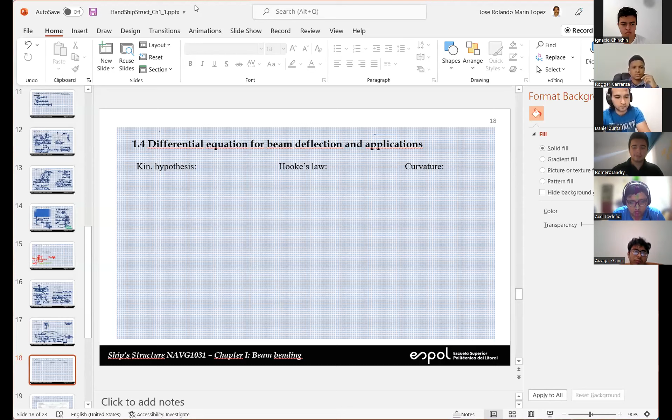Okay, so can you see my screen? Anybody? Yes, doctor. Thank you. I have a very small screen now. That's a problem.

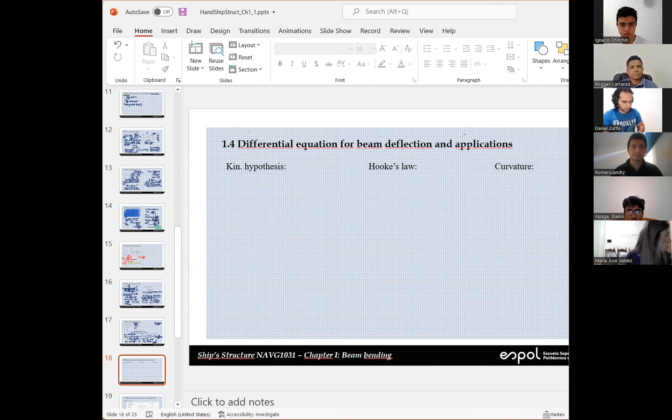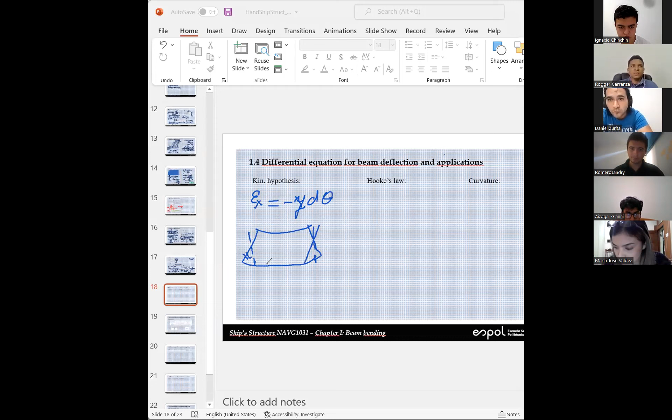So this review was about kinematic hypotheses, and this is what I'm trying to show here in this figure. Okay, so one of the ways we have to write the strain is that epsilon x, that's the strain, is equal to what? Minus y times d theta. And the thing here is that we have this deformed situation. This was the original one. So what we do is we draw a parallel to this in here. So this angle is d theta, and that angle is the same as this one. So if we are here, this is du. So du is equal to y d theta.

Okay, any questions about this, people? Anybody? Are you with me, people? Doctor, I have a question. Go on. Why is the sign in the strain negative? That's a good question. The thing is this. Let me erase this. Okay, everything here is positive.

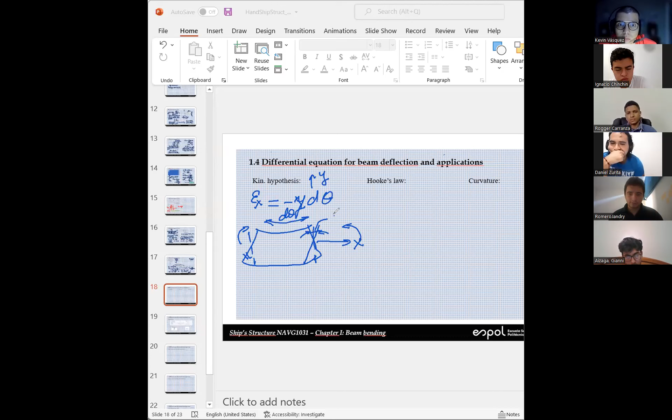And you see that with everything positive, this is the way the system is going to deform. So this is the u. And you see that the original length, which is from here to there, has reduced. Now the length is this one. So it is reduced. With everything positive, you have a reduction in length. That's why we need a negative sign.

I don't know who asked the question. I don't know who asked the question, if I answered the problem. Person who asked the question, please. Did I answer your concern?

I'm seeing that there is an error here. It's du equals minus y d theta. And epsilon x is du dx. So this is wrong. This is not correct. That means that if we divide this by dx, we get d theta dx. This is correct. This is not correct. But yeah, we need a negative sign.

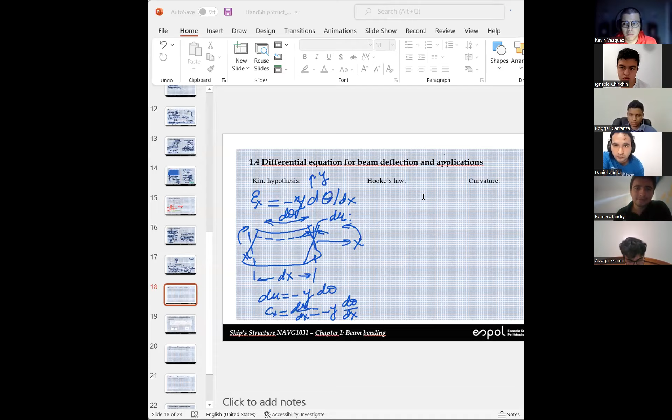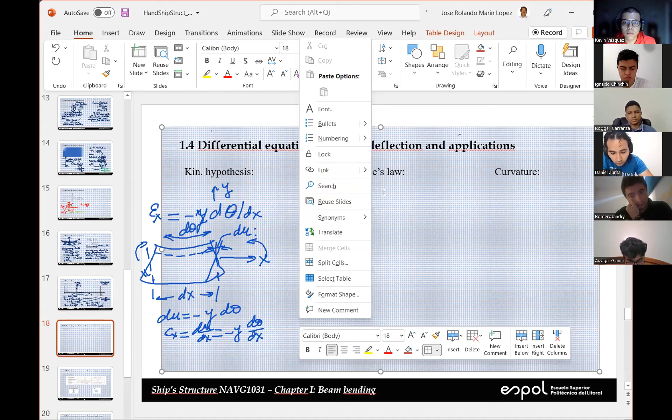And here, did you have problems with the symbology that I employed? See, the thing is this. This is rho, which used to be density. Here it is the radius of curvature. Now the radius of curvature exactly is this: 1 over rho is exactly equal to the second derivative of the function divided by 1 plus v comma x squared to the 3/2.

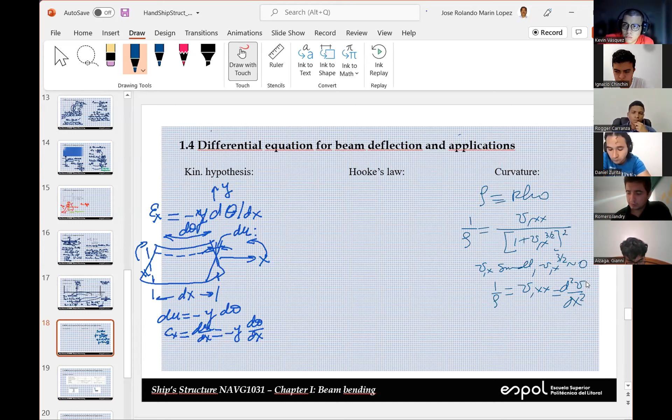That's exact. But what we do is assume that v comma x, the slope, is small. If this is small, we can say that the v comma x term is negligible. Then 1 over rho is going to be v comma xx, the second derivative of v with respect to x squared. This expression has units of length in the numerator and length squared in the denominator, so it's 1 over length, and this is 1 over length. Be careful, we have to check the units all the time. So this is the approximate expression for the curvature.

And I got lost here. The third question is the normal stress in beam bending. This is just an application of Hooke's law, which you have to review. When we have only sigma x, no other component of the stress tensor is different than 0. Only sigma x is different than 0. Then we can say that sigma x is simply E epsilon x. This is Hooke's law that you have to review.

Now, if you replace this using the approximation, this is equal to minus y v comma xx. So sigma x is going to be equal to E times minus that. This is an approximation, not exact. This one is exact. But the problem is that it is a nonlinear relationship. If we try to use it here, the solution process is going to be very difficult. That's why we prefer to simplify. So it's a simplification, but it's quite useful.

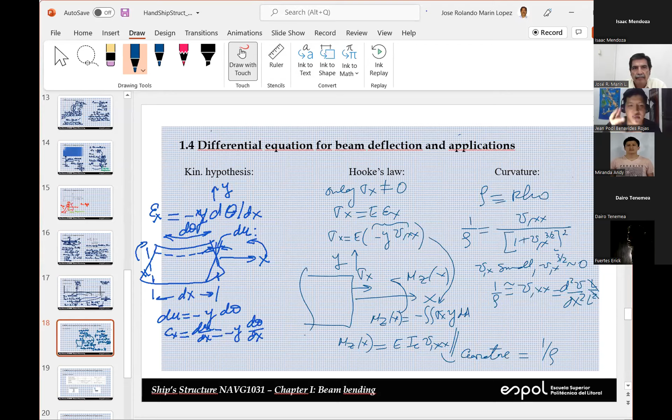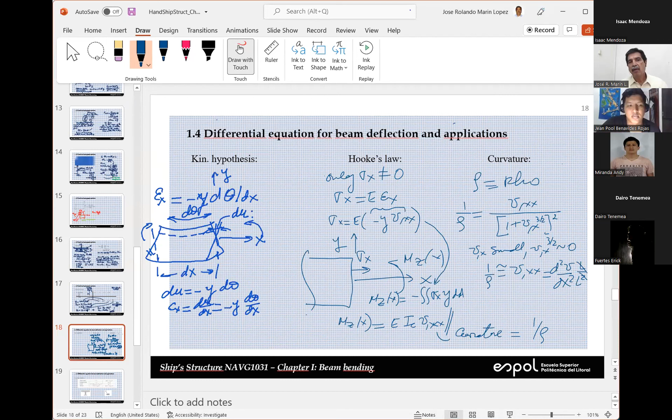Okay, Mr. Benavides, how was it? Was it too easy for you or what? Good morning, doctor. I think that I just want to prepare better, and at the beginning I was a little confused with the signs because I didn't understand well. Then in the second one, I understood better. Okay, the problem is that I don't have all these characters. I had to write rho, I had to grab theta, but I don't have the characters here to prepare this quiz. But anyway, the idea is to make you awake, okay? You have to review before the class. That's the message.

Mr. Tenemea, how did you do? Did you do well? Yes, well, for this evaluation. Good. Where are you right now, Mr. Tenemea? Doctor, I don't understand. Sorry. Where are you? In what city are you right now? In Cuenca. I live in Cuenca. Okay, good.

Miss Valdez, how did you do in this evaluation? 4 by 4? Not too well. I have to read more about this. Come on. Well, this is something which is very important. This is something that you mentioned, Ms. Valdez. In the evaluations, and this is for everybody, the first thing that you have to do is read. I'll say it one more time. You have to read.

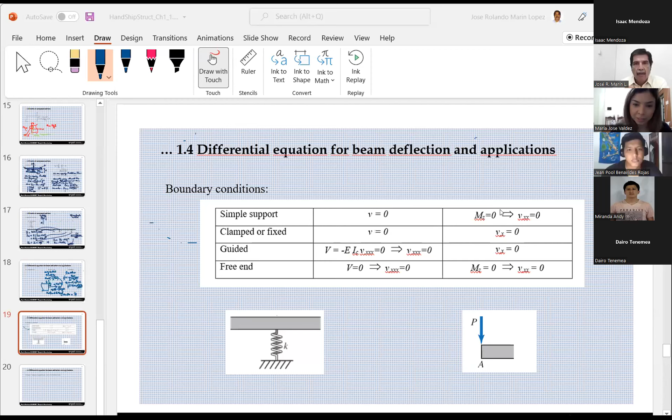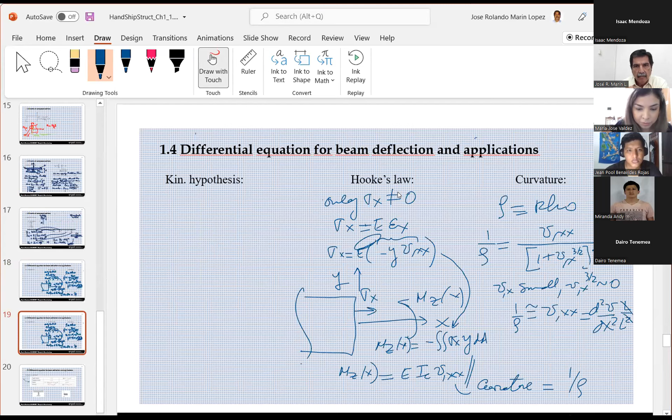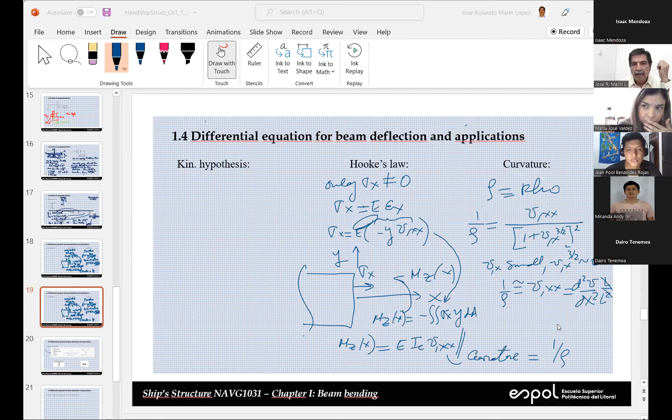Some reason, I don't know what it is. Okay, people, I need one fresh... Can you see my screen, anybody? Yes, doctor. Okay. So I have to write to the left because I cannot erase that. Let me see if I can erase this thing. Anyway, so here on the left.

We have two relations. First, we have something from equilibrium. And the equation is: the second derivative of the bending moment with respect to x is equal to p of x. This is inside the domain, so it is between 0 and L.

And now we said that the kinematic hypothesis, combined with Hooke, and also simplifying the curvature, using these three considerations or assumptions or simplifications, the bending moment could be expressed as E I sub c v comma xx. Now, what we do is we replace this into here.

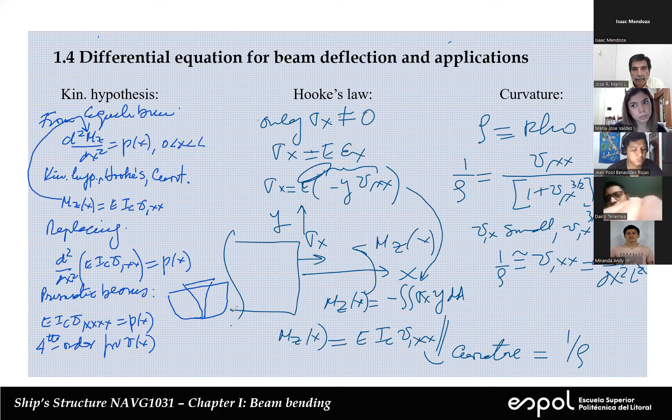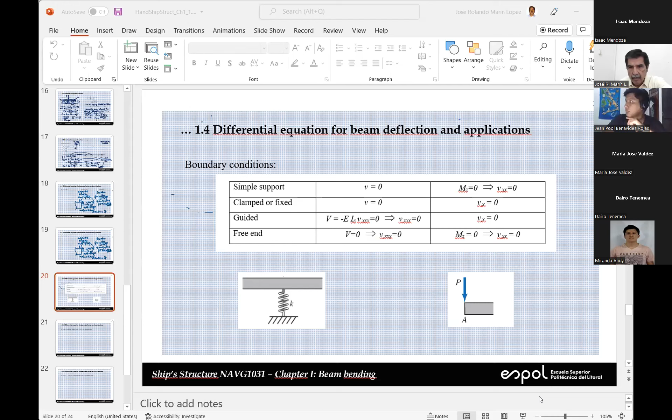Now, Jesus, I don't know what happened with this. Let me stop this because I don't know what happened. Just a second, please. Can you see my slide? Can you see my full screen slide? People? Yes or no? No? Okay, let me see. Today is Monday. Yeah, I know it's Monday. How about now? Can you see it now? Yes, doctor. Okay, good.

Okay, about the boundary conditions, remember that we need 4 of them. And here, these are the classical supports: simple, clamped or fixed, guided, or free end. Now, here I have separated them. In the second column, we are saying something about displacement. And in this column, I have something about rotation. So you see that for every type of support, you have one condition related to displacement and the other condition related to rotation.

For example, in the simple support, there is no vertical displacement and the bending moment is 0. Bending moment is related to rotation. In the clamped case, there is no displacement and there is no rotation. In the case of the guided end, there is no opposition to vertical translation. That means that the shear force is 0, so we have something related to displacement, force, and there is no rotation. And finally, in the case of the free end, it can move vertically and it can rotate. That means that there is no shear force and there is no bending moment. Hopefully all of this is good for you.

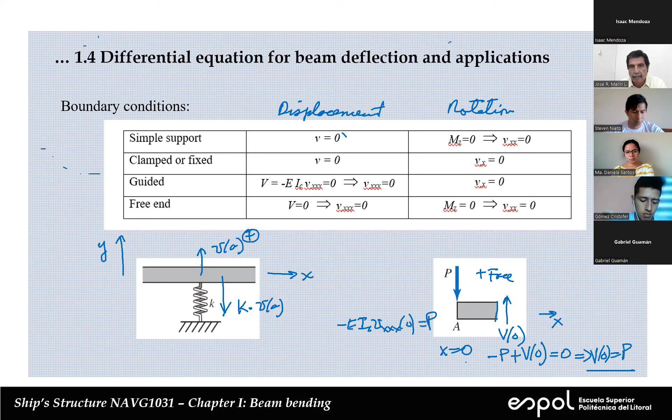Okay, now let's do a couple of examples. Let's consider a clamped beam with a concentrated force. So this is the example that I'm going to consider.

So it's clamped on the left, clamped on the right. We have a beam. You see that it is prismatic, and we have a concentrated force here. Let's put it downwards. So this is X, this is Y. The position where the force is applied is X equal A. The length of the beam is L.

Okay, so in this case, first thing that we have to determine is, is this a determinate beam or indeterminate beam? Mr. Ortega, Andres Ortega, what do you say? Is it determinate or indeterminate beam?

Indeterminate, doctor. How many, doctor, please don't call me doc. What are the reactions that we need to determine?

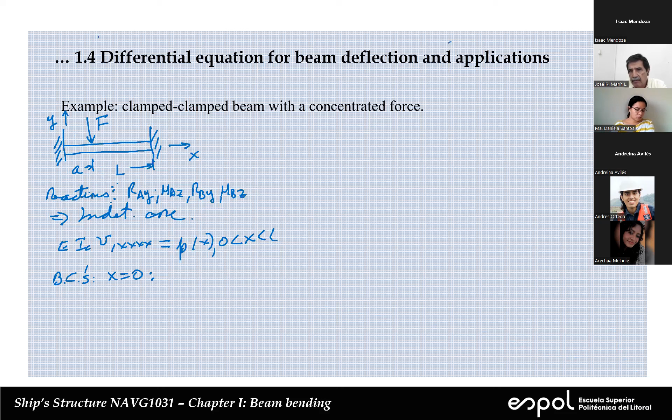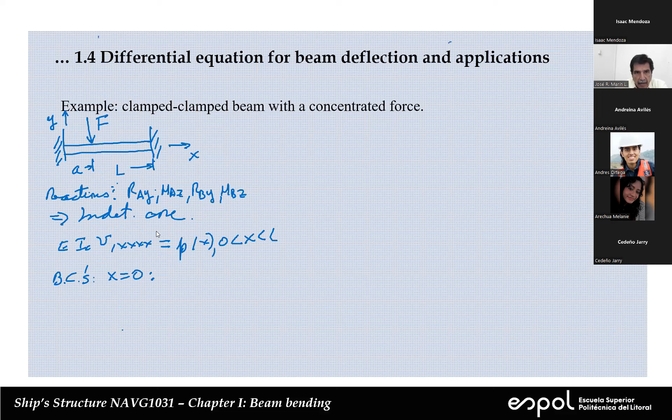No, it's a clamped case. Mr. Cedeño, Jarry Cedeño, what are the boundary conditions at X equal to 0? Slope equal to 0. And shear force equal to 0.

No, come on people. Miss Flores, Alison Flores, other boundary conditions at x equal to 0, it's a clamped end. Good morning, doctor - in displacement, it is equal to 0. On the rotation, the first derivative is 0.

Yeah, similar for x equal to L, right? So the displacement on the right end is also 0, and also the rotation. So this is it. And finally, before we go to the break, Miss Sigüenza, would you please tell me what P of x is?

P of x. Sigüenza, are you there? No? Okay, let's - oh, you're here. Go on. Sigüenza, are you there? No?

Mr. Soria, tell me, what is P of x? Mr. Soria? Yes, doctor. P of x. What is P of x, Mr. Soria? What is P of x? Let's write it here. What is it?

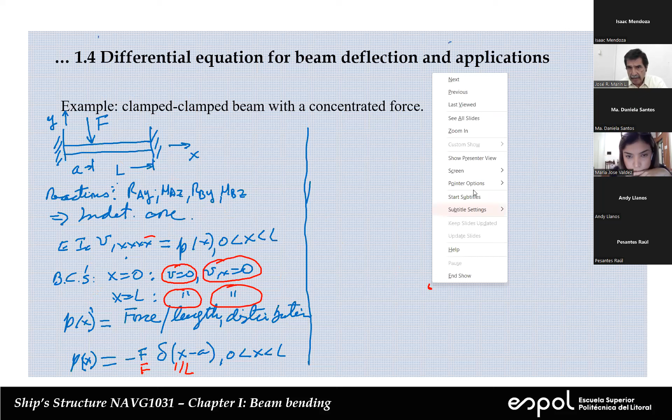Now, from now on, what you have to do is be careful in solving this problem. Now, let's take a break, and when we return, we can go on with the solution, okay? Let's take a break.